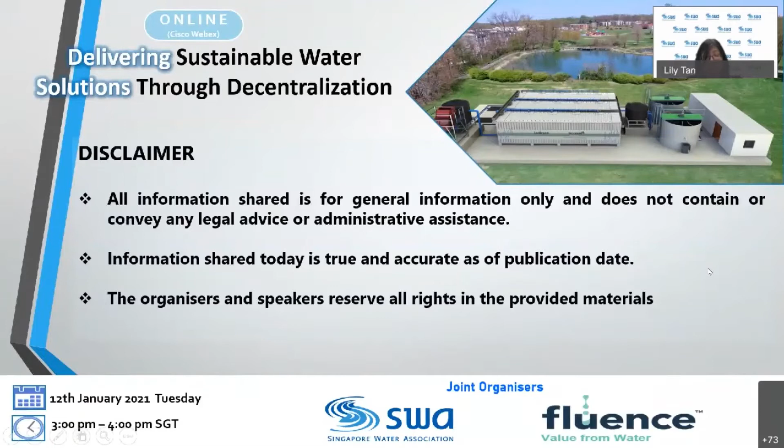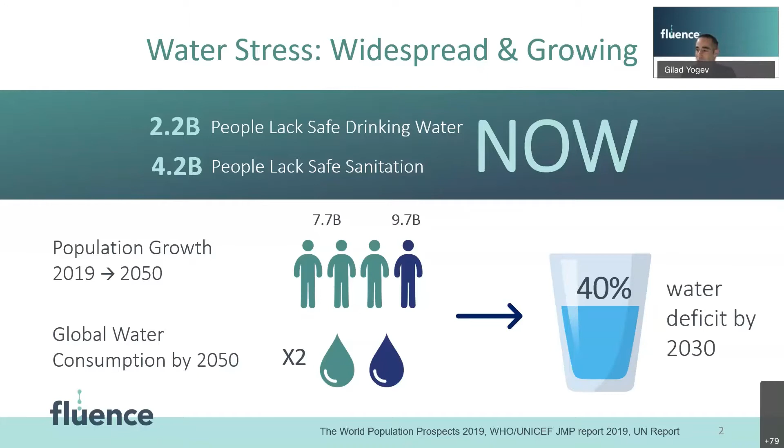Rural areas typically have a lower degree of safely managed sanitation, and it has many reasons: historical underdevelopment, governmental urbanization policies, funding difficulties, unplanned or uncontrolled construction without proper infrastructure to support it, among many reasons.

A drop of clean water in areas lacking sanitation will always go to drinking. But what happens after that?

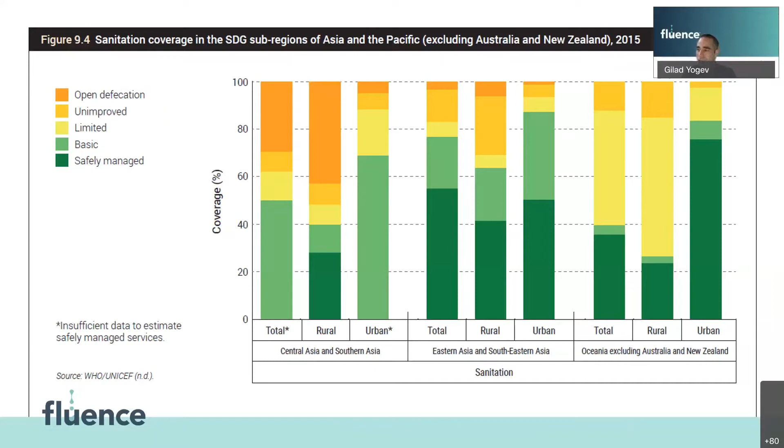The true future of water, as we at Fluence believe it to be, is circular, just like how Mother Nature meant it to be. From the source water, in the desal era some say produced water, through water treatment, safe water delivery, to smart and efficient water use. But what happens when the water goes down the drain? We all understand that we must treat wastewater.

But what we don't always understand in practice is the reuse and return to nature. We tend to use terms like discharge, outfall, outlet, effluent - just get rid of it and make sure we don't get fined for any violation of discharge standards. But when you look deeper into the concept and remember that the water cycle is a closed loop in our atmosphere, you understand that reuse and return to nature are much more correct, sustainable, and holistic strategies to manage the end link of your water cycle.

As humans, we always strive to achieve the highest goal, right? Conquer the highest mountaintop, achieve the toughest goal - reuse water, let's make it all drinkable. But today, out of the total percentage of water being reused, only 10% goes to direct potable reuse, and the rest goes to agriculture, groundwater recharge, toilet flushing, and other non-potable reuses.

That, together with more than 80% of global wastewater being discharged with no treatment at all, presents a huge opportunity to boost wastewater treatment and to reuse water to solve the global water deficit problems.

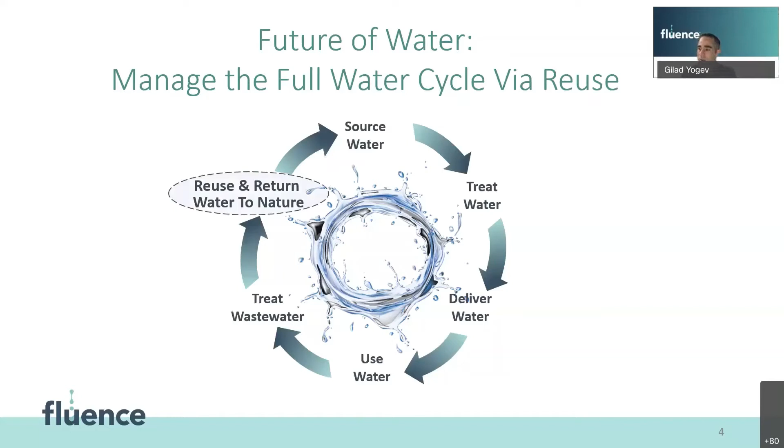Reuse is a solution to water problems not only in developing countries, but also in rural areas or new and expanding cities. Infrastructure is the number one cost in expanding water and wastewater systems, or in construction of new centralized plants and pipelines. Minimizing it and designing smaller systems for water reuse leads to more money available to invest in robust, sustainable plants with better final treatment and higher quality reclaimed water.

These small decentralized systems produce high quality effluent and can be an important part of the solution to the world's water problems. But to properly define the solution, we first have to properly understand the problems of the existing situation where we have large, intensive, and centralized plants.

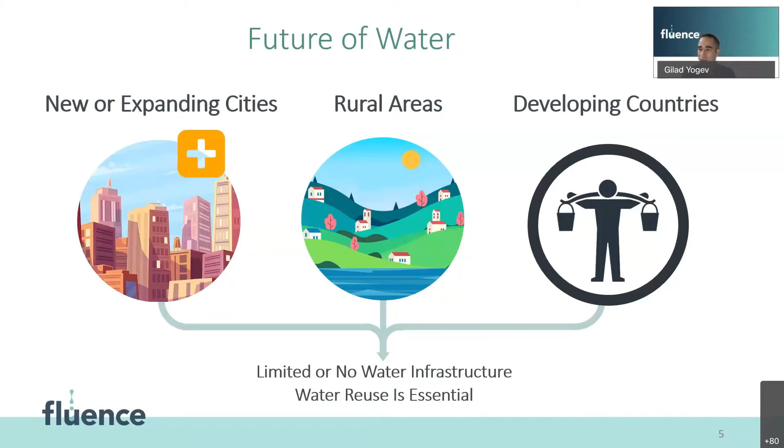This is a map of a region in southern Spain called Extremadura, a rural area with beautiful mountains and forests. It has a total population of 80,000 people, with small towns and villages from 200 to 35,000 people. The villages are connected to a large centralized wastewater treatment plant through a vast network of pipes and pumping stations to overcome the hilly terrain.

To get an idea of the system size, the distance from the most southern part to the treatment plant is 80 kilometers in a direct line. Now imagine an 80-kilometer long sewage pipeline.

In terms of capex of centralized systems, we tend to think about the treatment plant as the largest investment. It is indeed a huge operation that is slow to build and expensive to maintain, but when you zoom out and look at the big picture, it's even more amazing.

Sewer networks and pumping stations take up an astonishing two-thirds of the total capex required, while increasing the system's energy demand by 50%. The maintenance of these pipes and pumping stations is extremely expensive and complex.

It requires professional and trained personnel and increases the risk of failure and leaks. So the severity of an incident, once occurring, can be catastrophic. Think of a large pumping station that breaks down, or a major leak in the main sewage pipeline. An alternative to this setup is a decentralized design.

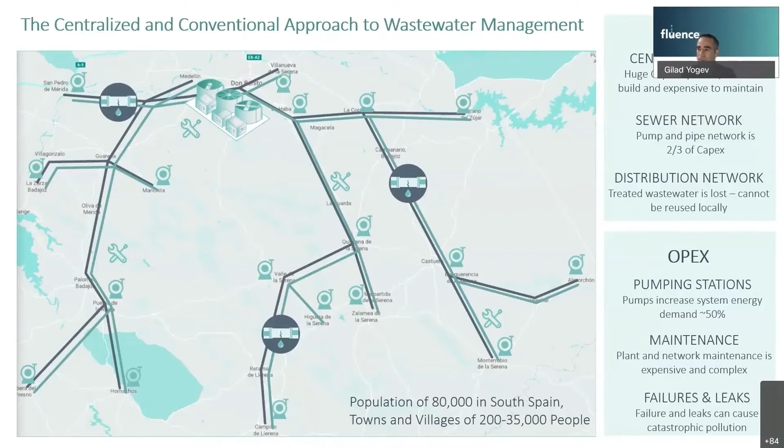So small decentralized plants spread throughout the region would lower the capex and be scalable upon need. You don't need to invest in a 30-year lifetime plant, including all the concrete works, roads, basins, buildings, etc., if you can only add a single treatment container every 5 to 10 years. Capex can be spread over time using smart business models, and the produced water can be sold to local needs, contributing to a more sustainable approach and supporting circular economy.

You can also eliminate most of the pipeline and pumping station costs. No large pipes, no extensive maintenance, no expensive infrastructure replacement. Treated water is close to the source and can be reused locally.

On the operational side, you may think that a large network of small treatment plants adds to the overall risk and takes up more attention and resources from the water utility. As a matter of fact, you're actually spreading your risks, minimizing the outcome of a failure incident and adding to the overall network resilience. By having smart plants that can be remotely operated under one central control room, you're low on maintenance as well. The water utility can maintain upon demand and reduce operation costs significantly. No need for the usual operator daily checkup, but send your operator in when he is really needed.

From a sustainable point of view, plants can be operated on renewable energy since they require much less energy, and can be shut down during no-flow cases, for instance at night. On the energy side, Fluence's MABR-based wastewater treatment solutions can provide significant energy savings, up to 90% less on aeration energy, with very little and negligible pumping energy. But we'll get to that in a moment.

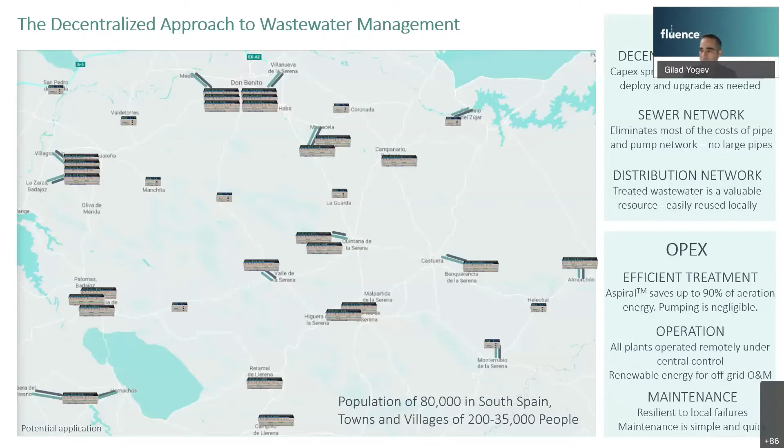Overall, the picture is clear in rural areas. One big, expensive, labor-intensive network with little water reuse versus a large network of small, cost-effective, energy-efficient plants that are easy to scale, expand, and maintain. A small investment is required when building the plant, and scaling up comes with the advantage of just-in-time capex. This is especially important for small communities, which rarely have the capital to invest in large systems and can benefit from reused water for irrigation and other needs at attractive prices compared to tap water.

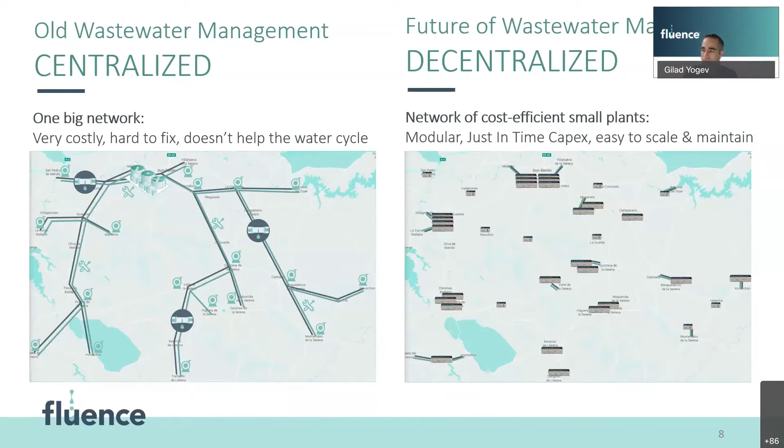The future of wastewater as we see it in Fluence is with decentralized plants focusing on savings in 4 areas: capex, energy, operation, and maintenance. The decision is a no-brainer for rural areas, but what about those dense populated areas, those huge cities, as in many areas of Asia?

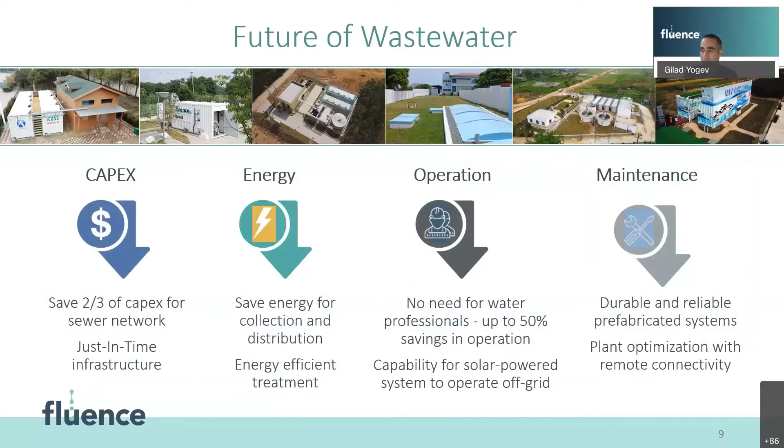Cities were the first to adopt water and wastewater treatment. From ancient Rome to the first modern sewer networks in London after the Great Stink of 1858, years of aging infrastructure lay under city sidewalks and roads, and since cities are always growing and expanding, the burden on these systems sometimes becomes too heavy to carry. But instead of connecting new neighborhoods to the existing old and aging network, why not divide and conquer? The decentralized approach again comes in handy.

Small networks can be designed for a longer lifetime and scale as the city grows. Local water treatment and management, reusing the water in the neighborhood for local needs, and returning the rest to green areas or nature, can contribute to a more efficient and sustainable system. So do we need to remove the old network to fit in a new decentralized one?

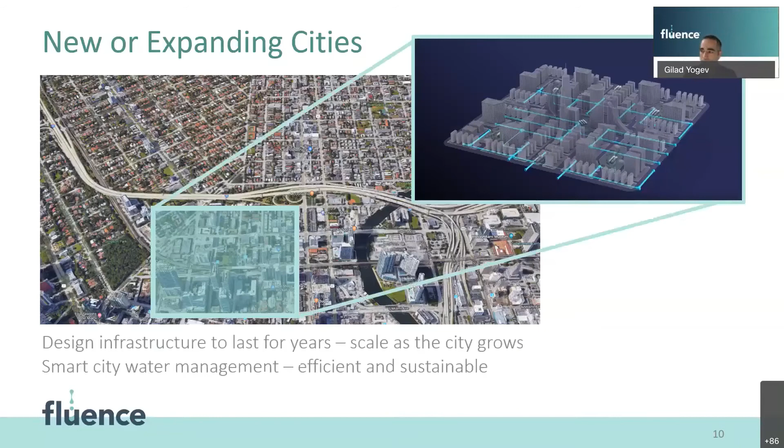Apparently not. Decentralized systems can use collection pipes laid in a piping overlay, a common practice in many small pinpoint centralized network fixes. That way you can bypass the existing network instead of upgrading, saving the immense amount of money required to dig up and replace old and decaying pipes. Pipe diameters are smaller due to the reduced flow compared to large centralized pipeline networks, and the deployment is fast, simple, and can be gradual according to the implementation timeline.

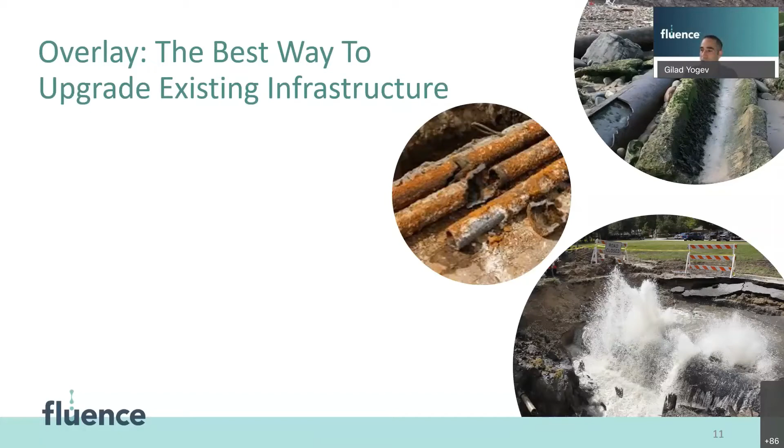So to sum it up, decentralized treatment systems are the only solution. Install these small, off-grid, renewable energy powered systems and reuse the water as a resource for the local community. For expanding cities, start out with a decentralized approach. Create new, independent, sustainable neighborhoods which keep the resources and labor local.

To summarize, let me show you a short video.

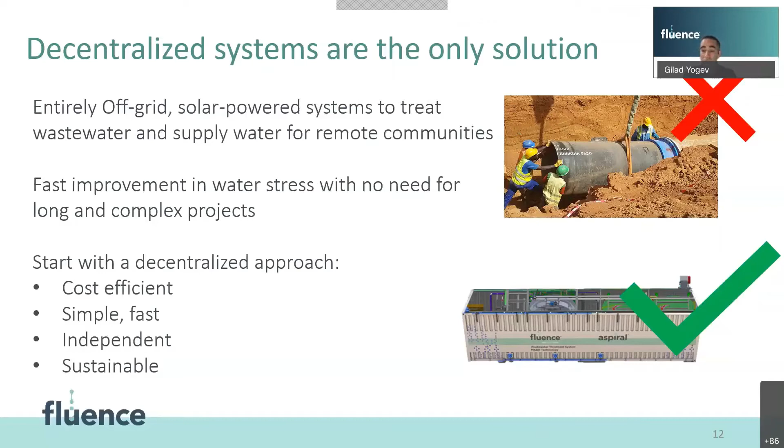I've spoken about the decentralized approach for some 15 minutes, but to prove I'm not the only one in the world speaking about it, here are some global examples.

China, in its 13th five-year plan, targeted wastewater treatment in most of its 130,000 administrative villages. Many end users in China from the industrial and commercial sector are seeking to reuse water sustainably for their needs. In the US, the Environmental Protection Agency has provided guidelines for decentralized treatment systems for the past 20 years.

Sydney Water, one of Australia's largest water utilities, has issued a policy for sewage mining, a concept where the utility pays per liter for reclaimed water drawn or mined straight from the pipe network and treated in a small system. This is a creative approach which greatly supports a decentralized agenda.

Several ISO standards have been written lately to support decentralized planning, focusing on the cost side. The figure on the bottom right is from a study performed in Jordan that presents a life cycle cost saving of more than 35% when going decentralized.

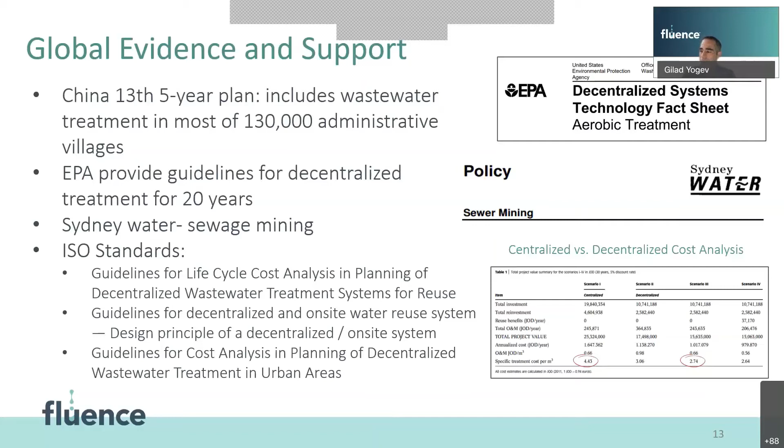However, the main driver for upgrading old and poorly functioning treatment plants is still the regulatory environment. Recent changes in wastewater regulation in China and the Philippines have driven many plants to consider upgrades. These new standards, set back in 2016, became effective during the past year and took a different approach to regulating wastewater treatment and effluent quality.

Instead of issuing plant or area-specific permits like in the US, or having different regulations per plant size or population equivalent like in the European Union, all plants need to adhere to these standards. Many small plants discharge bad quality sewage just because they can, which largely contributes to pollution, and those should be treated the same as larger plants, considering the negative combined effect.

So we're convinced that decentralized is sustainable, good for the environment, and will result in better quality reused water. But does it make sense when you look into the numbers?

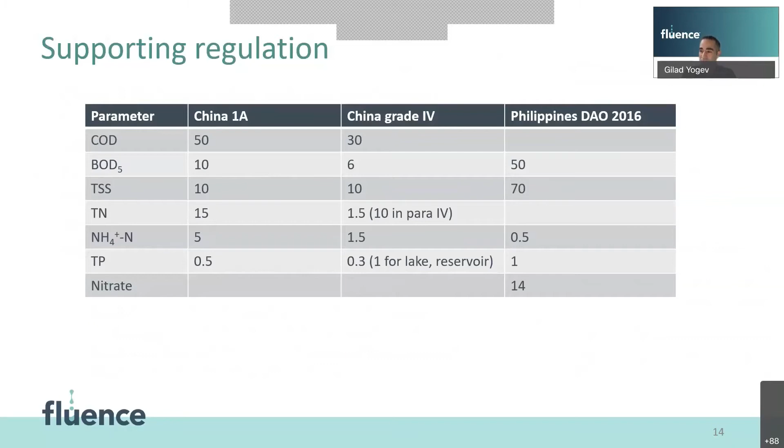Our CTO, Ronen Schechter, did a cost analysis on a small neighborhood in a town in northern Israel, where he happens to live. The current sewage collection and treatment setup processes around 900 cubic meters per day and has 3 main pumping stations with a total of 4,100 meters of piping, conveying the sewage to a centralized treatment plant.

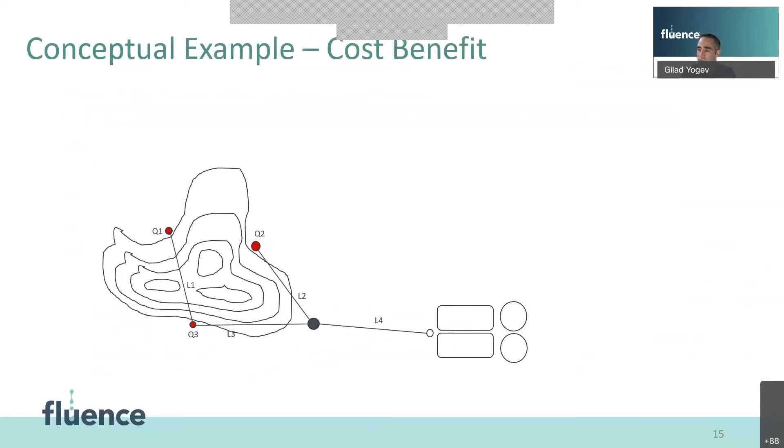But what would the decentralized approach look like? Three small plants, each 300 cubic meters per day, taking advantage of gravity for flow collection, would have eliminated pumping and energy completely. Remember, that's 50% less on OPEX.

Reduced pumping and piping cut the initial CapEx by two-thirds, resulting in a $134,000 installation cost benefit and a $442,000 life cycle cost benefit. This is money that can go back to the community rather than being invested in fixing leaks in concrete pipes or holding huge maintenance crews.

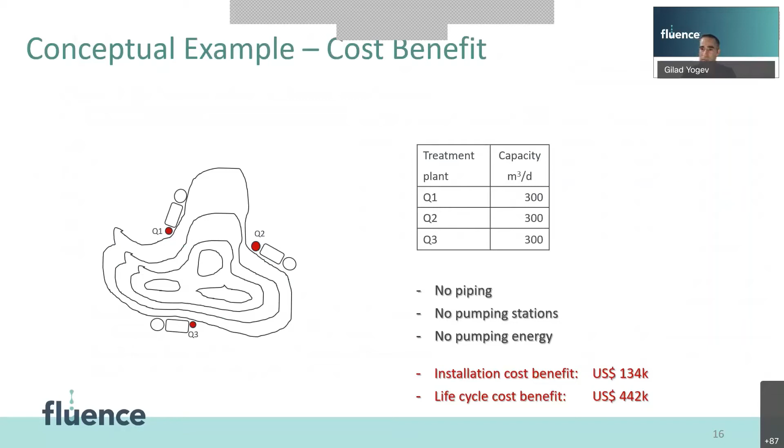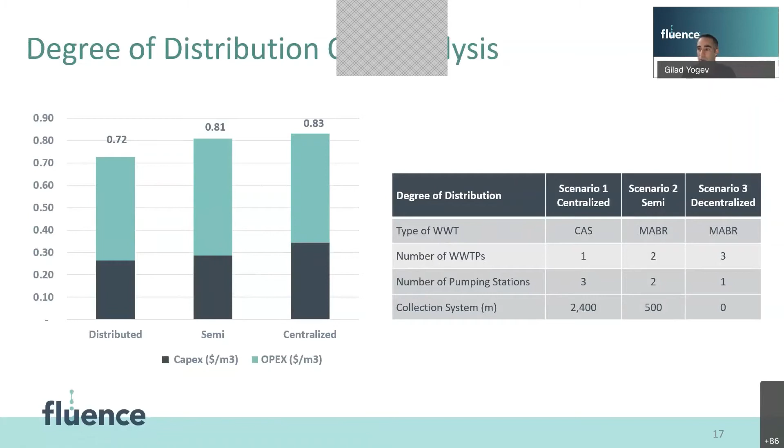This is another example of a study on CAPEX and OPEX, this time focusing on technology. Traditional centralized plants are in many cases conventional activated sludge or A2O plants. MABR offers a significant energy saving on aeration, and when combined with decentralized design, it can reduce both CapEx and OPEX, saving on life cycle costs.

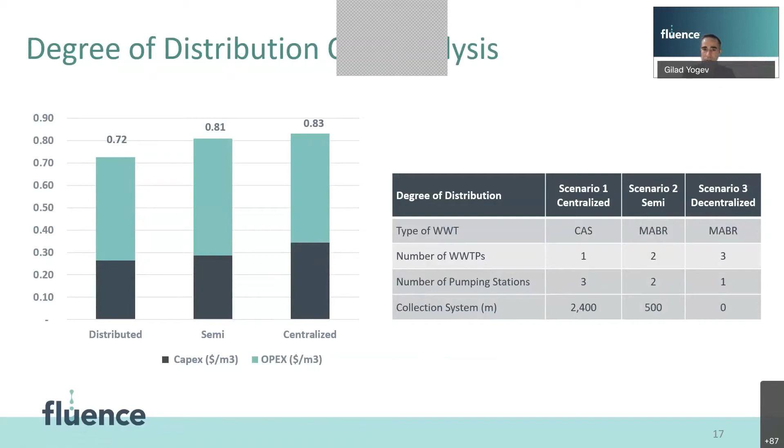So let's learn more about Fluence's decentralized solutions. On the wastewater treatment side, Fluence provides MABR-based solutions. MABR stands for Membrane Aerated Biofilm Reactor and is a rising and disruptive technology in the wastewater treatment world.

Solutions can be compact in a container, called Aspiral, or as an MABR tower called SUBRE, which can be installed in existing or new concrete basins. Smart water treatment for small communities is also available through the NIROBOX, providing high-quality drinking water from almost any water source.

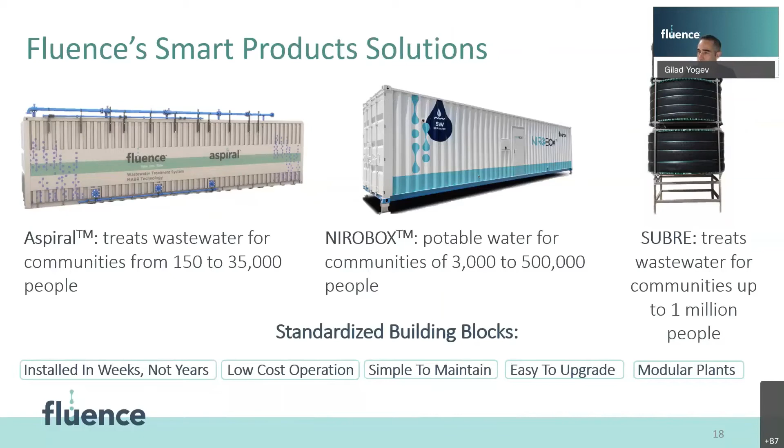Here's the MABR product portfolio. Solutions can start from up to 5 cubic meters per day, the micro, 50 and 120 cubic meters per day package plants, the Aspiral S and M, which you can see on the left side. You can also have building blocks for larger plants, the Aspiral L, the one with the 3 green circles, the green MABR modules inside.

Modules can also be sold as standalone units to be implemented inside existing or custom designed basins. For larger flows, approximately 1,000 to 100,000 cubic meters per day, we have the SUBRE technology, an MABR tower that can be submerged inside existing basins or used as secondary treatment for a new greenfield plant.

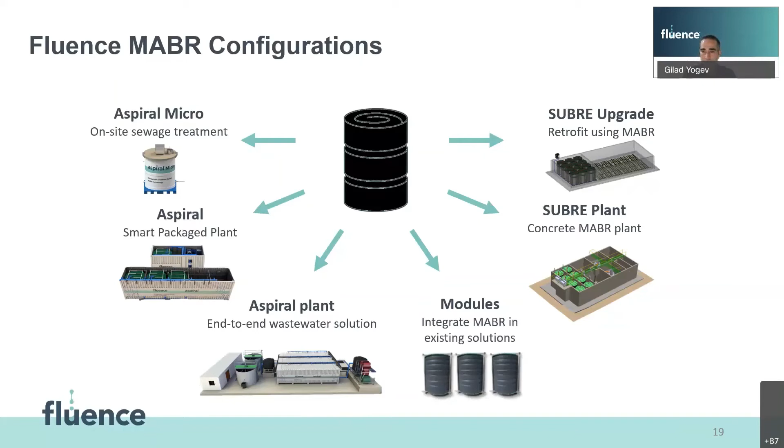To better understand the benefits of MABR in the wastewater treatment process, let's look inside the technology itself. MABR is basically the most efficient way to introduce oxygen to wastewater. As you all know, this is the most important design factor in any treatment plant, and it's also the most energy consuming part. Around 1% of the USA's total electricity consumption is used for wastewater treatment.

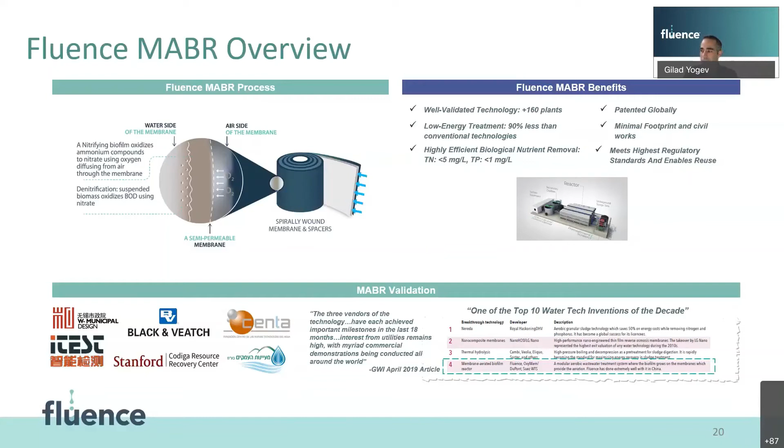MABR was chosen by GWI in 2019 as one of the top 10 water tech inventions of the decade. Fluence today has over 160 sold plants based on MABR throughout the globe, many of them in Asia. On the bottom left, you can see some of the firms we have cooperated with and provided solutions to.

So what does the typical plant look like? A typical MABR plant starts out with pretreatment, coarse and fine screening, and equalization if required. That's also where the only pump in the system exists. Wastewater flows to the MABR chambers, providing the complete secondary treatment and nutrient removal.

Most of Fluence's products use MABR in the IFAS configuration, using clarifiers for solid separation and returning the solids to form mixed liquor. Clean effluent can then be disinfected and directed to discharge or tertiary treatment and reuse. MABR provides a high degree of nutrient removal, and it does almost all of the nitrogen removal required in the process.

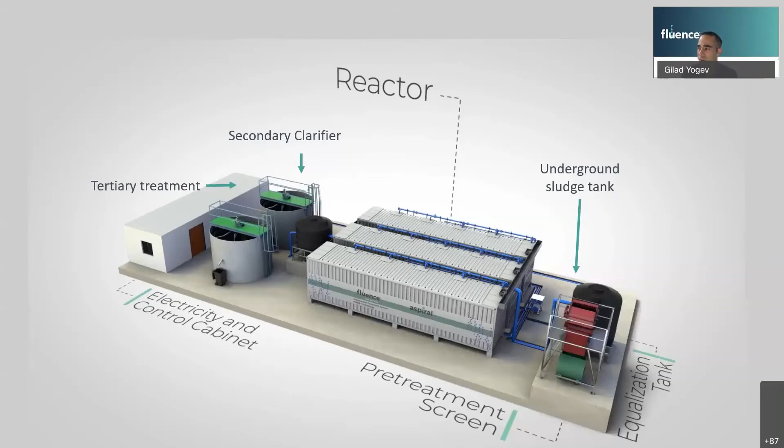Since the raw wastewater has a high COD concentration and a very low oxygen concentration, a very negative ORP, oxidation reduction potential, occurs, and that induces phosphorus release to the wastewater. As ORP conditions gradually increase, you go from anaerobic to anoxic to semi-aerobic, the bugs start uptaking the phosphorus, and that results in an overall 90% reduction in phosphorus only due to biology. We see many similar results in our installations, which are all staged to improve process efficiency.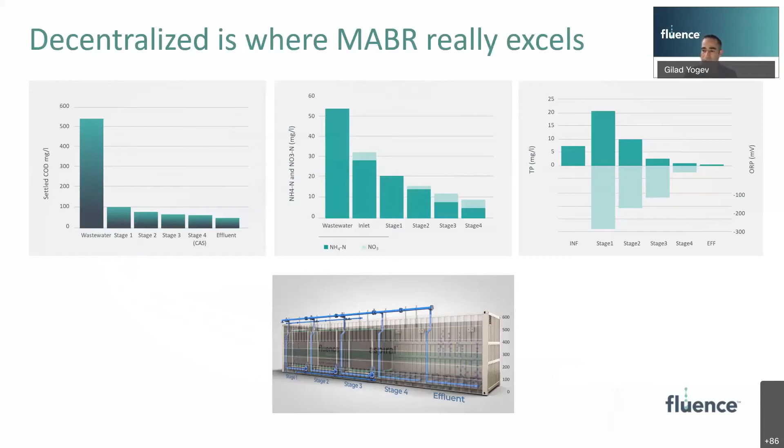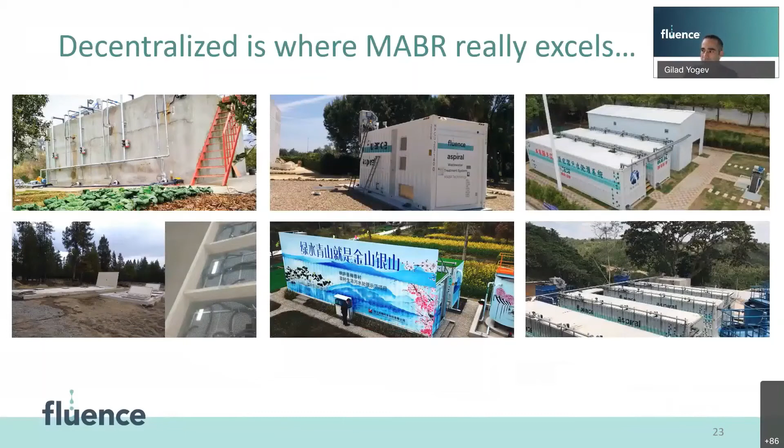So overall, with reliable nutrient removal, low energy, and fast installation and commissioning, decentralized is where MABR really excels. It fits like a glove. And I'll show you some pictures and installations.

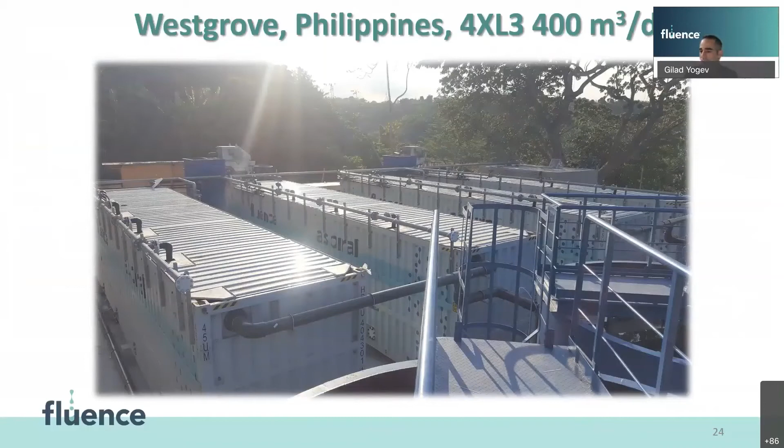This is a Westgrove Ayala Heights residential project in the Philippines. It needed a wastewater treatment solution, and it was scaling up, it didn't have the full flow from day one. So we built a 4-container establishment treating 400 cubic meters per day of very concentrated wastewater, and the plant was ramped up gradually.

Tonglu is definitely the number one in the beauty contest for decentralized plants. This plant in China treats 100 cubic meters per day of tough wastewater in a rural area in China to supreme effluent quality.

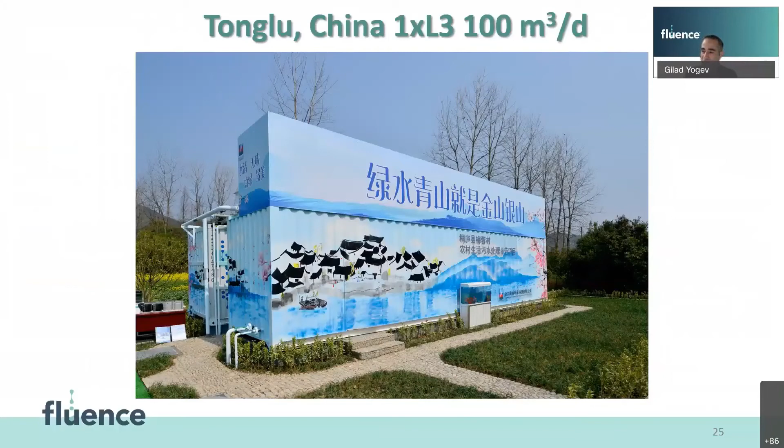Luoyang, China is a good example for the complete end-to-end solution provided by Fluence, including all the pretreatment, secondary, tertiary treatment, clarifier, and sludge holding.

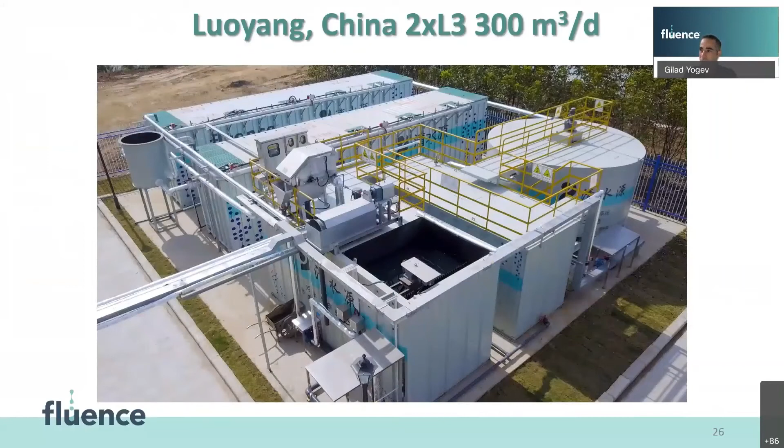The micro is the smallest member of the family and also the newest member, we call it the little brother. On the left, it's before the underground installation, and on the right, it's after. This unit can treat up to 5 cubic meters per day of influent, providing the same effluent quality.

It has all the benefits of nutrient removal by MABR. Last plant, which was our first major plant in China, was the Xiaogan plant done for iTest, a huge company operating thousands of kilometers of highways throughout China. Two years ago, iTest selected Fluence as a wastewater treatment supplier for all their wastewater needs. This plant is located alongside a highway service station and treats very concentrated wastewater to a tertiary effluent quality, enriching a local stream.

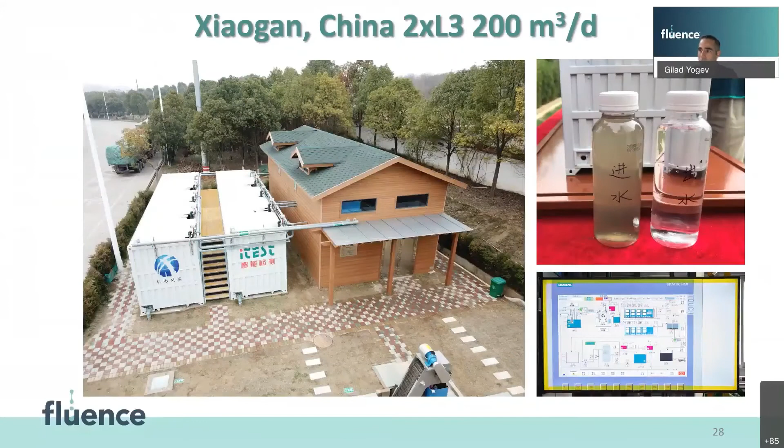So China is a great example of the successful implementation of the decentralized approach, with over 200 plants sold in the past 3 years. The local need for distributed decentralized treatment, together with the many advantages of MABR, combined a true success story for Fluence and for MABR and local communities that all benefit from high quality reuse water.

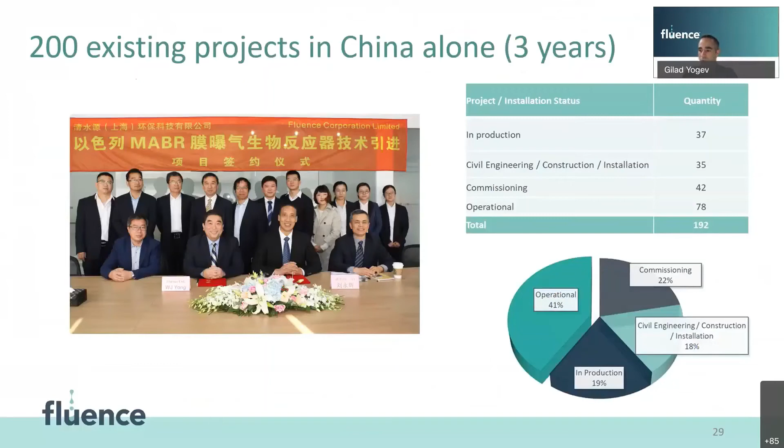So thank you all for your time and attention, and I guess we'll go to questions.

Right, so we have an option to control the process through 3 distinct approaches. One is through parameter control, meaning controlling our blowers and the pumping system to the containers, based on effluent sampling. It can be weekly, it can be more frequent, but it's a more decentralized approach.

The second approach is according to the dissolved oxygen. We have an algorithm to control the dissolved oxygen and maintain conditions proper for simultaneous nitrification and denitrification. The last, most high-end approach, is combined dissolved oxygen and ammonium and nitrate sensors, which through our control algorithm modify the aeration and mixing frequency of the MABR modules to provide the right amount of nitrogen removal needed to meet regulations. That way you don't over-aerate the water and waste energy when it isn't needed.